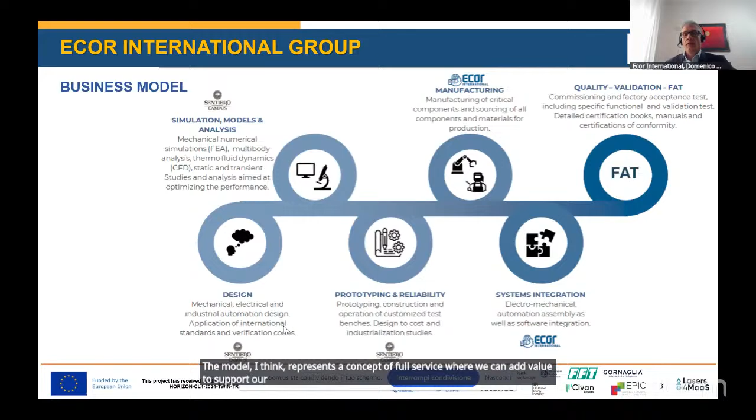Our Ecor business model offers an integration of advanced technologies for welding and manufacturing, combined with competencies in the whole product design and development up to prototyping. The model represents a concept of full service where we can add value to support our customers, not only for manufacturing but also on product design to achieve a specific function.

The business areas, as I explained before, are mainly four. Here you can see the first three that are connected with the manufacturing of components. We are a service company, so we do not have our own products, but we produce products according to the specification and requirements of our customers.

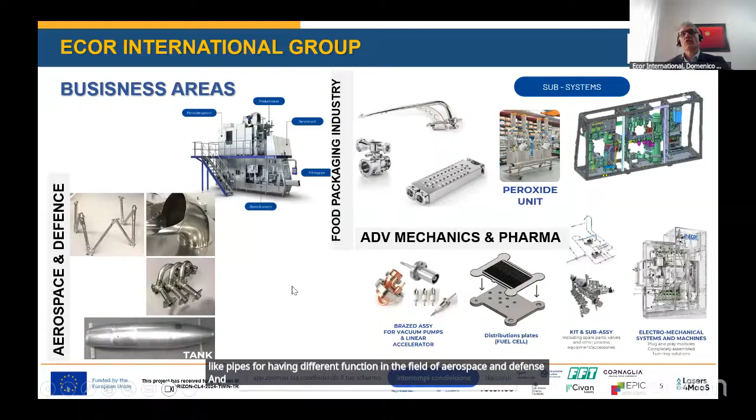Some examples to understand what we produce in different fields, and to understand how we have a really diversified market where we are able to supply different components with different qualities. We go from single components up to subsystems, for instance in food packaging industry, to structural or other types of components like pipes for different functions in the field of aerospace and defense, and really a great diversification also in advanced mechanics and pharma sector.

As I explained before, research and development for us is not only a cost, but really a business area. For this reason we have a research company dedicated only to industrial research, supporting mainly the customer and only a little bit Ecor International. The turnover is more or less 80 million euro for last year, and we have 56 persons dedicated to industrial research.

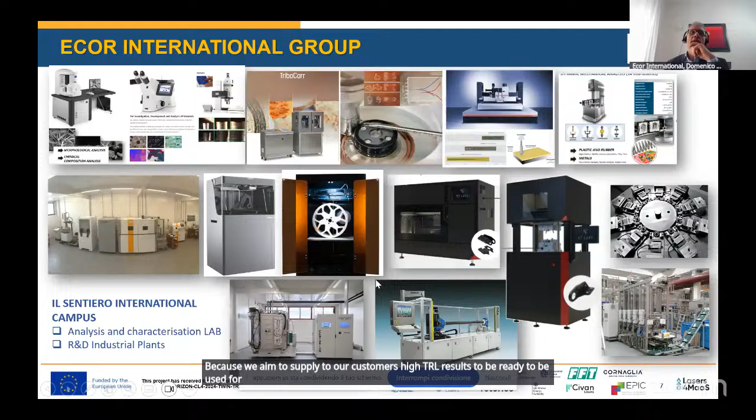Our competencies vary from 3D printing to functional design, surface engineering, metallurgy, welding, brazing technology, and so on. All the plants dedicated to industrial research are industrial plants, because we aim to supply our customers with high TRL results ready to be used for the specific aims they require.

Let's start to speak about market technology. I would like to show you how the Lasers4MaaS process project is really well integrated in the industrial area, how it aims to impact at the industrial level from the point of view of different markets, and also in the automotive or e-mobility sector.

So if we look at market penetration, this means that we leverage the company's established strengths and market knowledge in order to increase the existing markets. An example could be the improvement of product quality or features to encourage repeated purchases. From this point of view, the development or introduction of innovative and advanced technologies inside the company can be an answer to this first strategy.

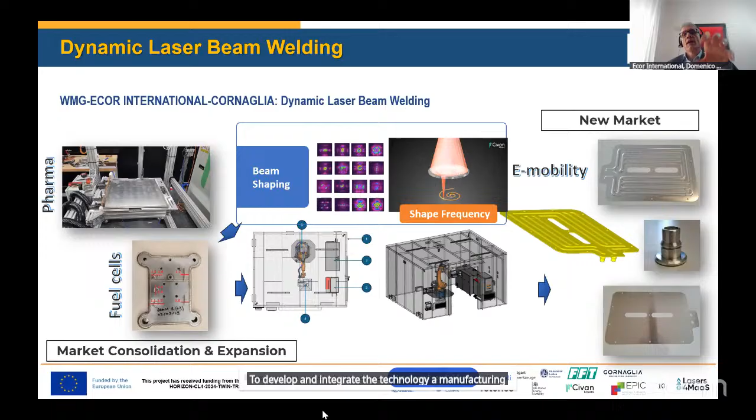To develop an integrated technology, manufacturing, and service platform able to reach this specific target.

We have seen the complexity of the parts that we produce. We have a great number of geometries, a great number of part numbers, and the thickness of the sheets we use to manufacture the different components. We have different precision constraints and so on.

Of course, all these variables impact laser requirements. So the market needs, the end user needs, and the technology needs really have different effects on what is necessary, what is required from the point of view of the end user for laser process and equipment.

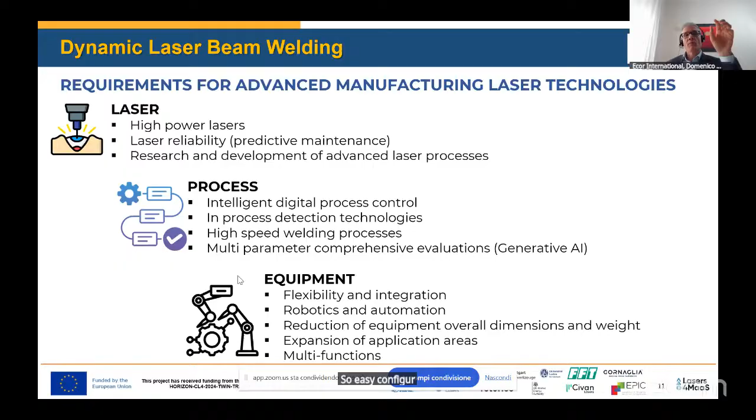I would like to stress the fact that these main characteristics cannot be considered as alternatives or standalone, because laser technology needs to be considered as a whole set of features of modern advanced technology, collected together. So easy configurability and reliable performance are mandatory for this field.

We see every day there is something that introduces a new variable in the market. By exploring new markets, developing new products and services, partnering with other businesses, investing in R&D, or embracing new technology, the business can reduce risk and increase the chance of long-term success.

So technological diversification can help organizations mitigate the risk associated with relying heavily on a single technology or market. By spreading investment across multiple advanced technologies, a company can reduce its vulnerability to disruption or shifts in customer preferences.

Then, in today's rapidly evolving business landscape, enterprises face the dual challenge of maintaining competitiveness in existing markets while exploring ways for growth and expansion. Traditional strategies for diversification often rely on geographic expansion, for instance, or product line extension, mergers, acquisitions, and so on.

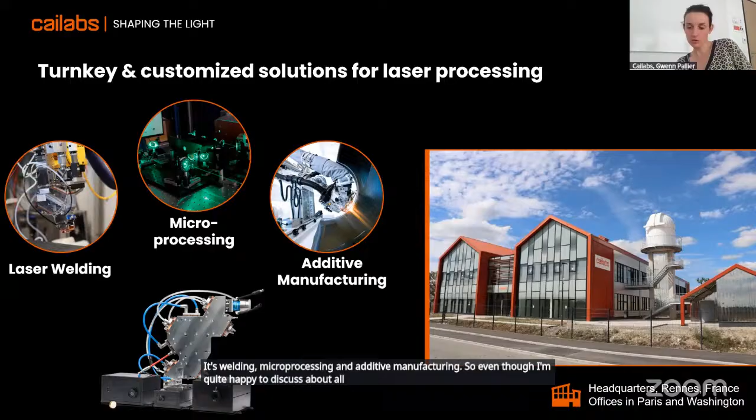So beam shaping technologies - you did say it already a few times, Antonio, even though it's only 3:37 here in France. Beam shaping is more and more discussed, and there are more and more beam shaping options. So let's try to shortly just review what beam shaping means.

First of all, why do we need beam shaping? Well, after working for a bit more than 6 years now at Cailabs, there is one thing that I'm sure of: it's nearly always possible to improve a process with beam shaping. But you have to actually go through a certain thinking process to find a good solution for your process.

The first question is, what exactly do you want to improve? I insist a lot on that, and that will be a real part of my talk today. I want to insist on problems that the industry is having and that beam shaping can actually solve.

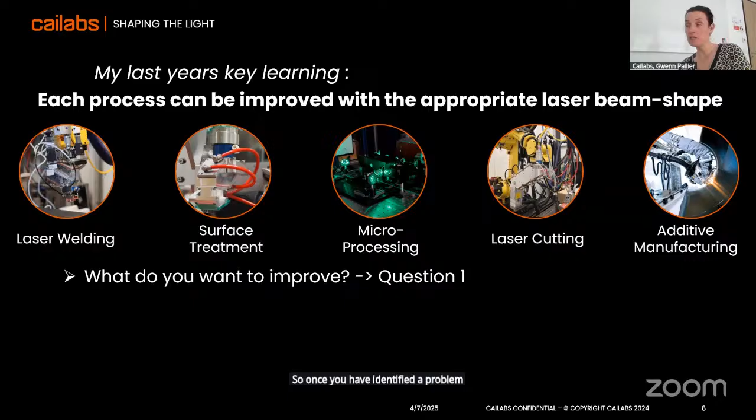So once you have identified a problem that you need to solve to improve your process, then you need to figure out what is the best shape to tackle that problem. Then when you have defined that the good shape to tackle that problem is whatever shape - let's say it's a triangular shape - what means a good triangle versus a bad triangle?

It's also very difficult, but it's quite important to identify what are the criteria which are important to improve your process. So typically, is it important that you don't have higher orders, or is it not so important? Is it important that your shape is actually really homogeneous, or is it not the main criteria? All those discussions have to be made at some point.

Once you know what is a good shape and what makes a shape a good shape, you need to think about what is the best technology to do it. There are a lot of different technologies, and because of the way the beam shaping is made, your capacity in terms of shape, but also in terms of robustness and price, are extremely different. So then only can you identify what is the best technology for your process.

And in the end, it all comes down to: will it cost you more than what you are saving in terms of money? Even though I will not address that part today, it's for sure an essential question that everyone has to address at some point. The idea is obviously to help our customers make money.

It means either improve the quality. It's quite important to know that beam shaping can help with a lot of things that maybe aren't so obvious at first, like improving mechanical properties, or processing more complex parts. All that is possible with beam shaping.

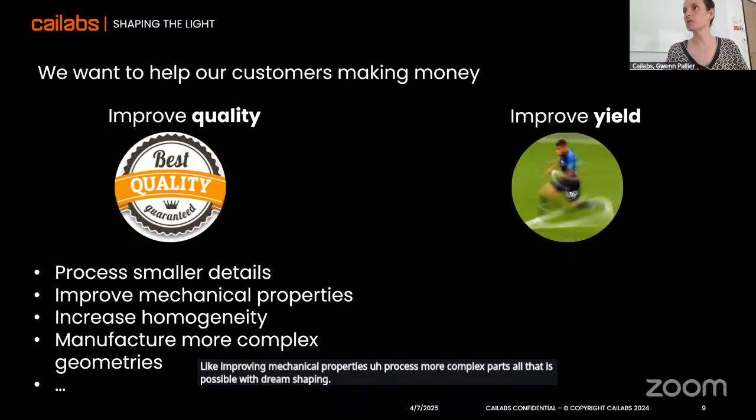But I have to admit that most of the time we try to go faster, we try to improve the yield. It can mean more speed in the process, like welding faster, but it can also mean removing steps in the whole process, like removing pre or post-processing, which has a huge impact in the end on the whole time of the manufacturing process.

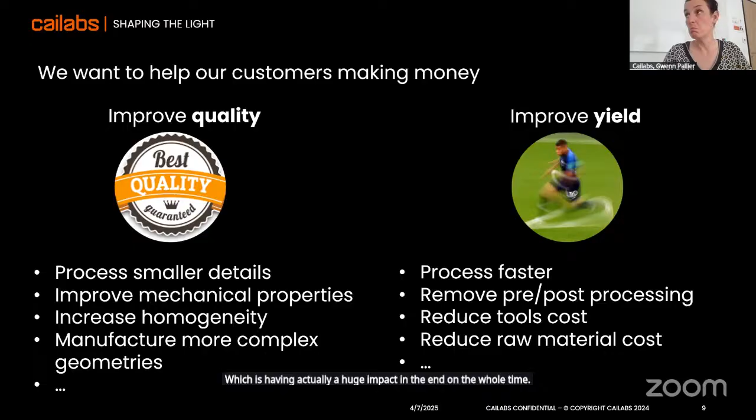You have multiple fibers, which are not all made the same way, but in the end, basically you can make a ring and a dot. Then you have coherent beam combining, which is in the end dynamic beam shaping, so it's a beam moving very fast.

And then you have a lot of ways to do beam shaping which are not inside the laser. So in that case, you are more or less free to use whatever laser you are having, and you are implementing the beam shaping after the laser, inside a module or inside a laser head. And all those technologies use different ways to design the system, but also different ways to manufacture it. And in the end, it gives different performances. I don't have time to discuss all technologies today, unfortunately, but I'm quite happy to discuss it if you wish to reach me by email.

And I will focus on explaining what we at Cailabs are doing. That's what we were doing 10 years ago: multiplane light conversion. The idea is to do freeform beam shaping, any kind of shape, but we also manage to tune the phase profile. So it means that you have a shape which has a planar phase in the process plane, which is extremely important if you want an extended depth of field. And we do that based on mode propagation, which is a system that is fully reflective. And what you see on the right is how it looks when we develop products for laser processing.

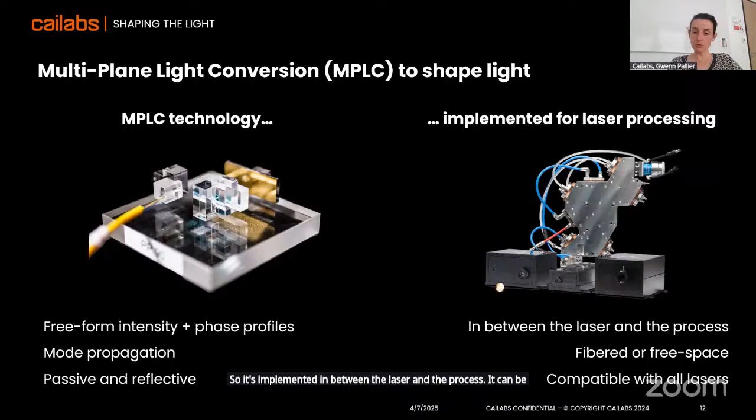I generally like to say now, there are so many technologies, just like there are so many ways to make a laser - fiber laser, diode laser, disc laser. And after some years, it's been identified that some welding is best done with some type of laser. I expect that one day the same will happen with beam shaping, and we will have a clear map of what beam shaping technology is best for what process. But this map doesn't exist yet. Just to say it, what Cailabs proposes is compatible with all types of lasers, monomode to diode lasers, CW to ultra short, and all wavelengths.

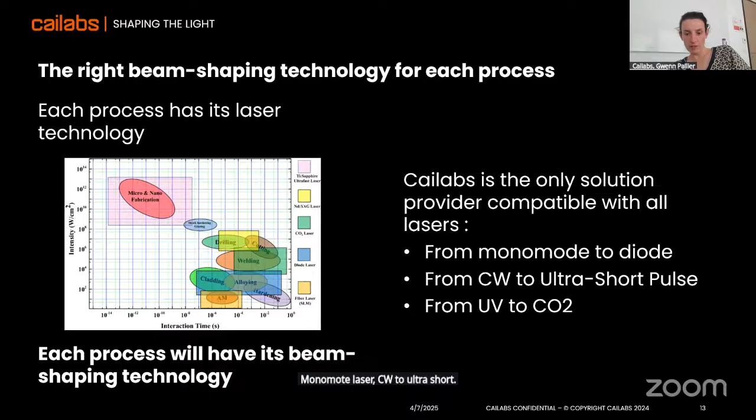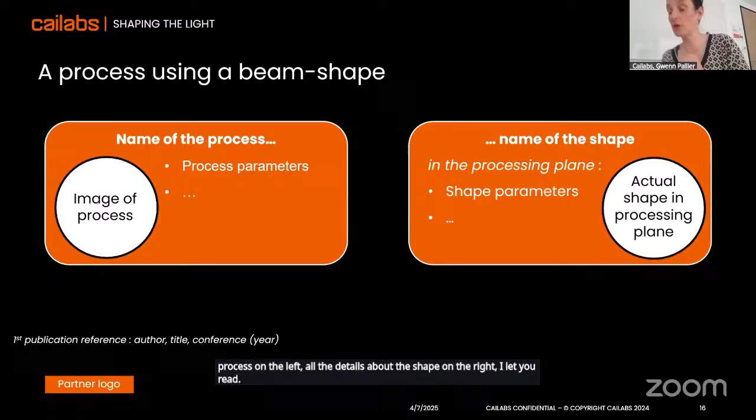So there are a lot of ways to do beam shaping. We have our own way at Cailabs. But why is beam shaping actually a game changer if you want to be a world leader in e-mobility? Some process results - I will go through a lot of different applications, and I don't want it to be too technical a presentation, so I will not be detailing all the process parameters, dimensions, setup and all that. All my slides will be organized the same way: an image of the process on the left, an image of the shape on the right, all the details about the process on the left, all the details about the shape on the right. I'll let you read - even though I speak very fast, you are all reading faster than me. And I will then explain why that shape can improve the process and why it's actually useful for the industry.

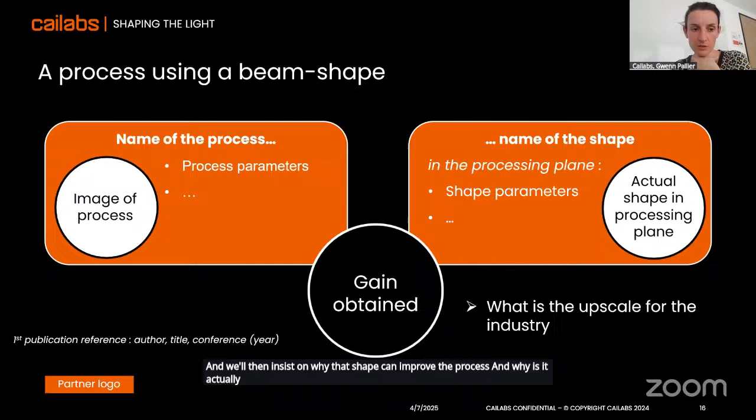We started with hairpins, which is a quite classical application, made of copper. In that case, we wanted to focus on the spatters. Spatters are really critical when you do hairpin welding, because you don't want to have spatters going to another hairpin further, and in the end having

shortcuts in your electrical circuits that can make the car burn, or whatever terrible thing could happen in that case. So we managed to demonstrate, by just changing the beam shape from a standard shape to a ring and dot, that we divided the spatters by a factor of 2. This is actually super important if you want to reduce the scrap rate, to increase the

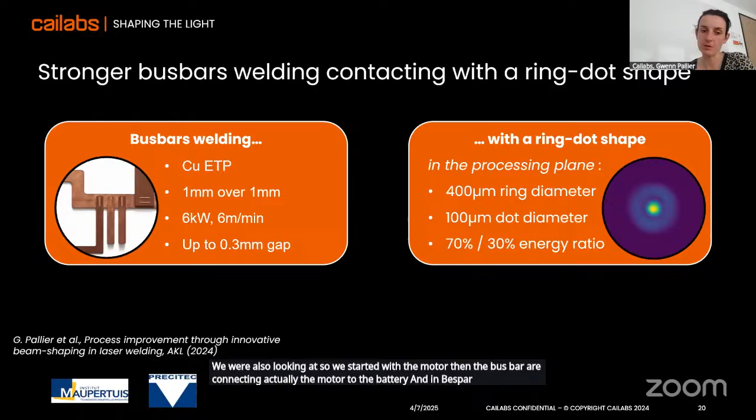yield of your manufacturing. We were also looking at bus bars. So we started with the motor, then the bus bar connects the motor to the battery. In bus bar welding, it's also essential to apply beam shaping if you want to manage a higher gap. It's quite known in e-mobility that you need zero gap welding. Well, it's not that true. It's possible to manage some gap, and beam shaping is really helping a lot when you want to do that.

If you apply the proper shape, you manage to actually increase the gap that can be accepted, and that gives compliant results by a factor of 1.5 compared to no beam shaping. This is extremely important if you want to simplify the fixtures. Fixtures are complex and expensive and long to manufacture, so that's an excellent way to make your production more flexible and simpler.

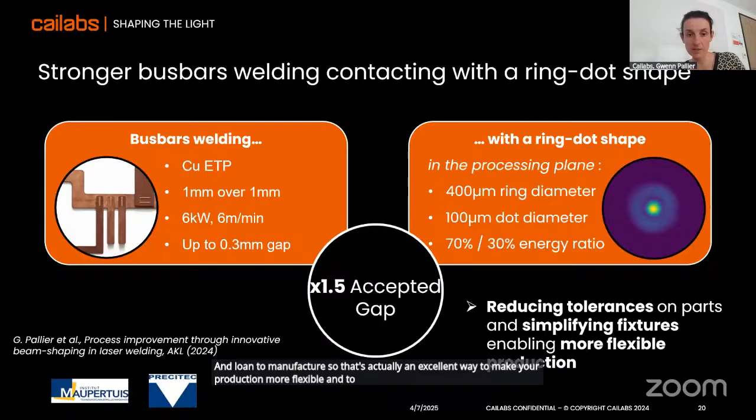The motor, then the connection to the motor, then we go to the battery itself, so cell contacting. In that case, we were working with the only battery module which we could communicate about, because most of the time it's super confidential. So that module is developed by Fraunhofer ILT. As you all know, you have seen probably electric cars in the streets.

So it's been existing for a long time, and there are ways to do this cell contacting, but the most common way to do it is to use what is called wobbling. Wobbling is doing a lot of little circles during the process. And I was quite strict with our partners, and I said, don't do wobbling. Whatever you do, don't do wobbling. We want to replace wobbling with beam shaping, and it works.

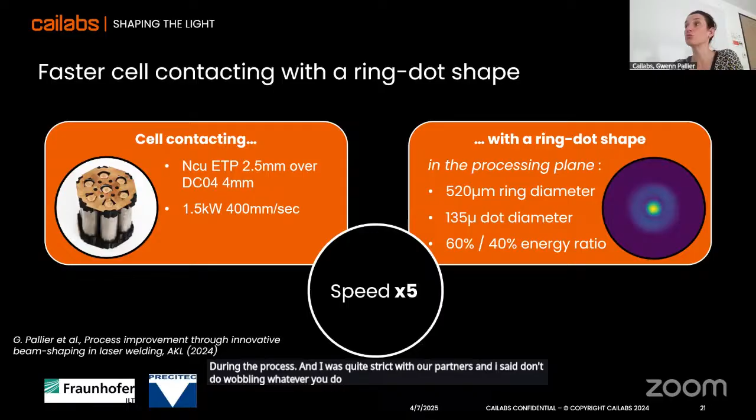If you don't do this wobbling when you are doing the cell contacting, you can actually increase the speed by a factor of 5. That's, of course, excellent to increase your manufacturing yield.

And again, regarding the bus bar, there was one last point that I wanted to stress: you can also weld deeper. If you have an extremely stable melt pool at a fixed power—and I insist, at a fixed power, because if you have more power, of course, it's easier—but you can slow down the process, which is super difficult, keep a stable keyhole, and manage to weld deeper. In that case, we were managing to weld 3 mm over 3 mm at 8 kilowatts.

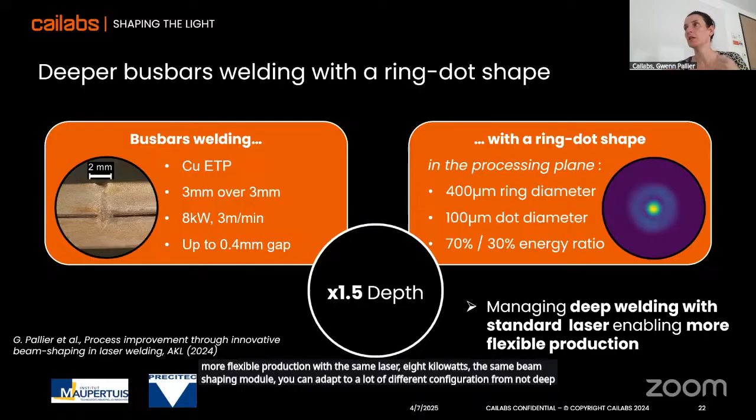Why is it so useful if you want to be a world leader? Well, it enables a more flexible production. With the same laser, 8 kilowatts, the same beam shaping module, you can adapt to a lot of different configurations, from not deep weld to deep weld of copper. It's working in any case, and it's extremely nice to have a flexible production.

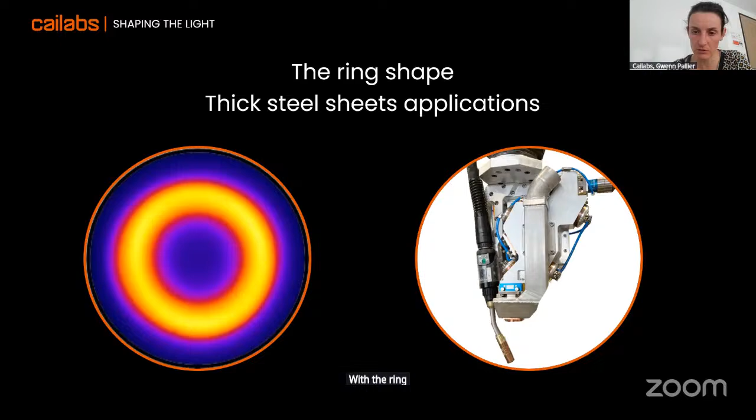I will shortly mention some other applications, because I think it's good to talk a little bit about copper, since it's a classical topic of e-mobility, but we have actually worked on other parts of the vehicle as well. In that case, we have developed a solution which is a hybrid laser arc welding with a ring shape and with an arc which is added to the laser head. This is the laser head with the connector, collimation, shaping mirrors, and focusing optics.

For now, we have been working on steel, but we will extend to other materials in future. The idea is, again, to manage higher gap. So it's definitely possible with a ring shape to increase the gap which is accepted when you are doing thick welding. In that case, we were actually welding steel plates of 28 millimeter thickness, which is excellent to compete with arc welding.

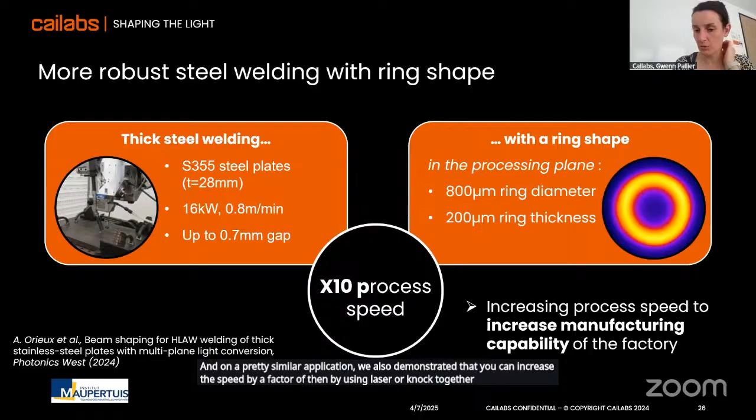So it's very difficult to switch from arc to laser because the process can be a little more challenging, but it can also be more reliable and more efficient. You need to have something very robust, and beam shaping enables that. On a similar application, we also demonstrated that you can increase the speed by a factor of 10 by using laser and arc together, which is obviously very good for manufacturing capability.

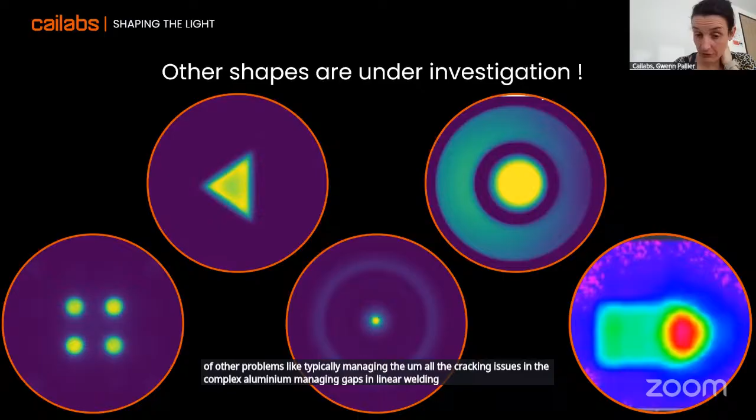There are a lot of other shapes that can solve other problems, like managing cracking issues in complex aluminum, managing gaps in linear welding, and a lot of different problems. There will be many more results in the future, so follow us and look at what we are developing. We are really trying to address a lot of different issues with our beam shaping solution. This is just the beginning.

We are working on having systems compatible with more power. We want combined functions, we want dynamic systems — it's already under development, we did it at R&D stage, and we have to make a product out of that. We also work on new wavelengths, complex shapes that are not possible with other beam shaping technologies, and new applications.

So my conclusion now — I think I did show it today. It's really possible to upscale laser welding with beam shaping. We are really providing solutions for a lot of issues in the industry. And I always insist people think out of the box. There are a lot of possible shapes in the world, and it's not clear yet what shape is best for what process. So keep bringing us problems, and we will try to keep bringing you solutions. This is it for my presentation.

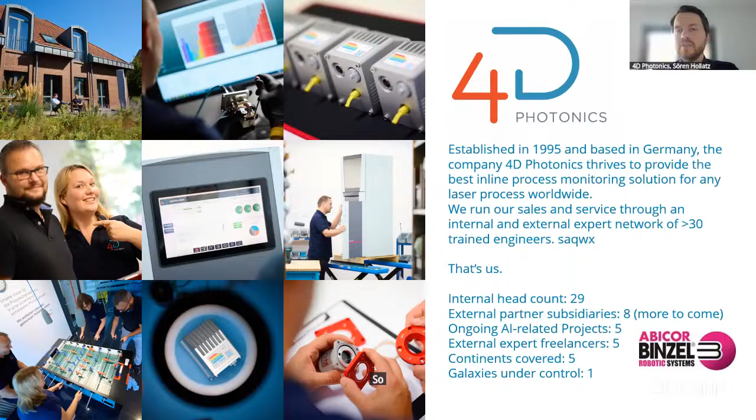For laser processes and process monitoring, we have two main goals that we are dealing with in our products. First of all, we'd like to increase the process monitoring accuracy, because having pseudo faults or missed faults is very, very painful, and at the end very expensive in production.

The second goal is that we also like to classify the faults. So having a bad part is one thing, but having a bad part where you know the reason why it is bad, that helps you to adjust your production, to maintain your clamping devices or your safety window, let's say optics or whatever might cause this fault. These are always the goals that we are offering the customer.

Therefore, we have introduced a new product, the 4D sensor system, and this whole system is called 4D Watcher. It is based on photodiodes, so we can coaxially integrate it into a laser head.

So we can coaxially integrate it into the laser head and acquire the data that is coming from the process. All kinds of light emissions exposed by the process are going into our sensor system, and there we have a couple of different photodiodes catching the laser radiation, the visible range, and also the near-infrared range.

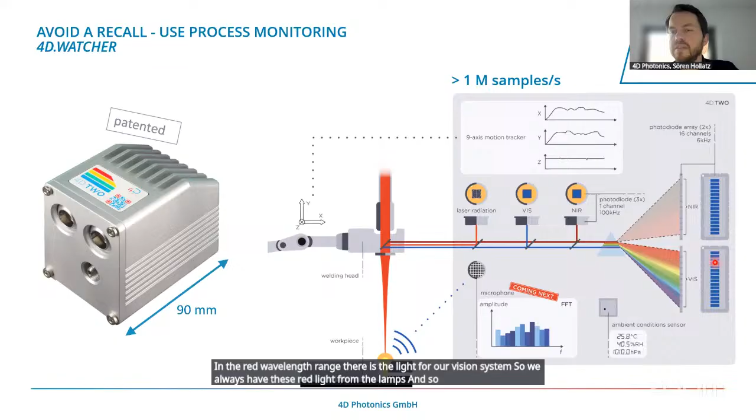We usually do not need any kind of hardware filtering. We can just say, in this range, like in the red wavelength range, there is the light for our vision system, so we always have this red light from the lamps. We just leave these channels out of our monitoring without having any filter necessary there.

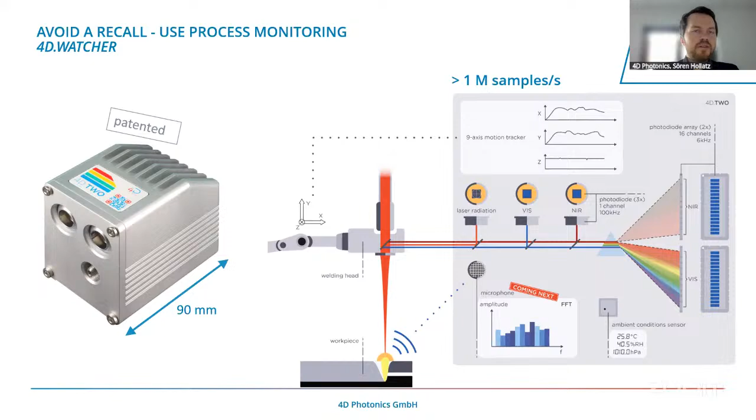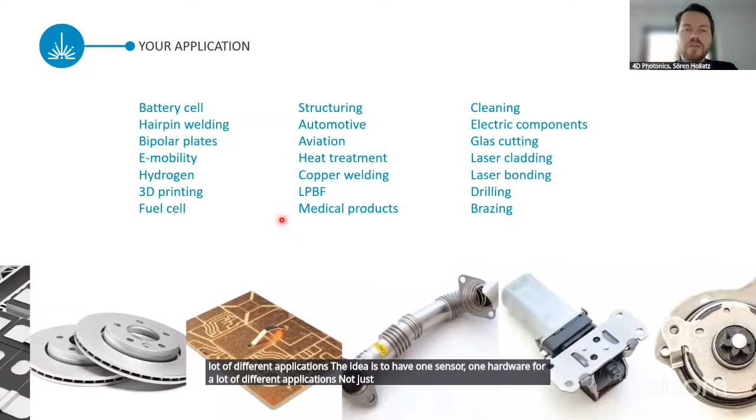With this sensor, we're trying to reach a lot of different markets, a lot of different applications. The idea is to have one sensor, one hardware for a lot of different applications, not just laser welding, also laser powder bed fusion, laser cladding. There might be also a picture of a brake disc here on the left, and also ultra short pulse processes and whatever you might think of.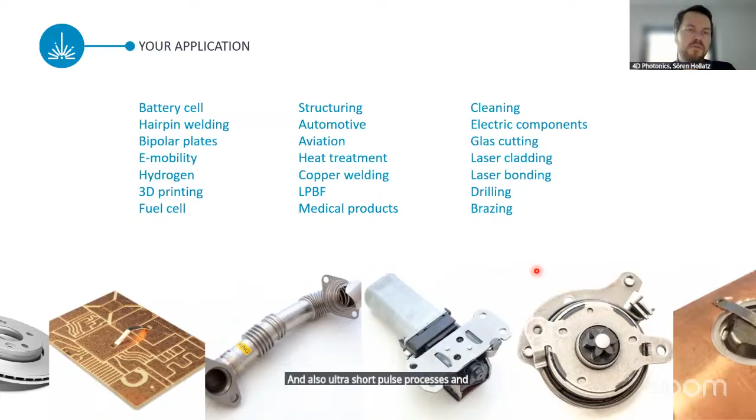So for today, due to the limited time slot, I've brought two examples of what we are right now doing, and there I focused on faults which are very difficult to identify with other sensor systems or in visual inspection in this case.

The first one is gap detection. Gwen also introduced that it's no issue with their laser to weld with a gap, but still it's an issue that happens there and which we like to avoid, or at least to detect, so we can decide if we can tolerate it or not. And this is a fault you usually can't see, especially when we're talking about battery welding with a couple of hundred battery cells in a module. You can't see if there is a gap under your bus bars.

And there we did a lot of experiments with a couple of research institutes first, and then with a couple of companies. This one is exemplary data from an aluminum to aluminum overlap weld, like for prismatic battery cells. Here in the bottom, we can see the result of one of the welds that has a gap inside. So in green, this is our reference band. All of our reference welds' signals are included in this green area. This is more or less the area which is fine for us, which we are tolerating right now.

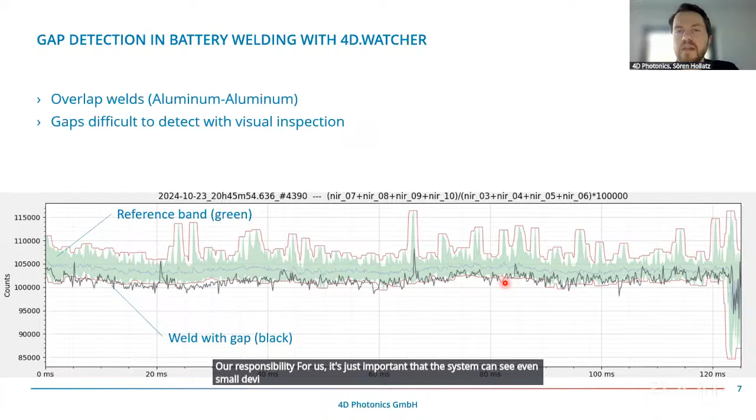Another short example, Gwen has also introduced you to the hairpin welding, welding of two copper pins. Here's one main issue that this process can lead to pores inside your hairpins. And this is also a fault type which is very difficult to see with different visual inspection methods or whatever else you can think of. And as long as you're not going to do a very expensive CT analysis, we might help you with our sensor system.

So to make clear, we are not able to directly measure the gap or acquire the gap or measure kind of pore volumes. We can just give you a probability based on the process. The process is changing in some way, and we have to match it to the fault which is occurring in the end.

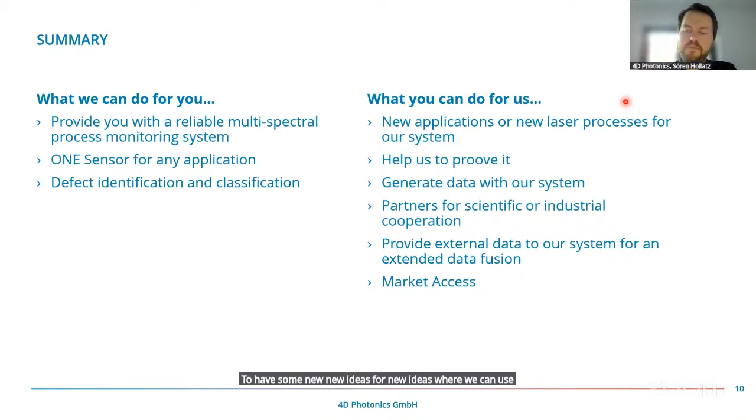So that was a short overview from my side. If there are any questions, I have a lot more slides, but we are limited in time, so I'll keep it with this one.

Hi, thank you for the talk. I have a question regarding welding—the wobble technology is quite used, and I would like to know, is there kind of an interplay of this XY wobble technology to your sensor? I mean, does the signal change, and do you need to make new reference measurements in case one uses the wobble technology?

Yes, the signal definitely changes because when you're wobbling, if you have a circular wobble for example, you're always hitting cold material in the front and warmer material in the back. So this is definitely affecting the signal. But usually it's not an issue that it won't work at all. You just have some kind of a sinus wave on your signal, and you're doing the reference process again for your wobbling process, and that's not an issue.

Also, we're actually dealing right now with the idea to combine our sensor signals with the scanner data, so the scanner position data. And in our lab it actually works pretty good. So at the end we can have like a two-dimensional spatial path of your laser, and we can match our sensor signals to this one. So you can also see if you have some irregularities due to this wobbling.

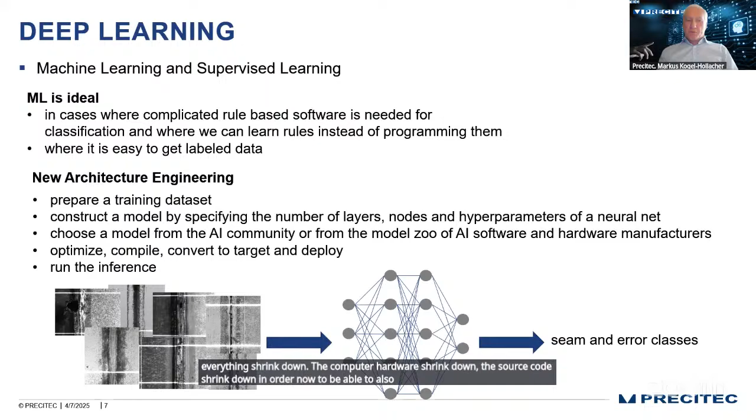So it's really fascinating how everything shrinks down - the computer hardware shrinks down, the source code shrinks down - in order now to be able to also process, meaning in real time, get the error classes out of that. And doing that, for example in tailor welded blanks, we have a very high classification accuracy now. So when we go with pre-weights, we are already at 99%.

So this is really, really fascinating how much we now can support customers' applications with very accurate monitoring. But for sure, monitoring is not only camera-based. Typically, the applications are much faster, and really extremely fast camera technology is also extremely expensive. That's why we are still working also with photodiodes.

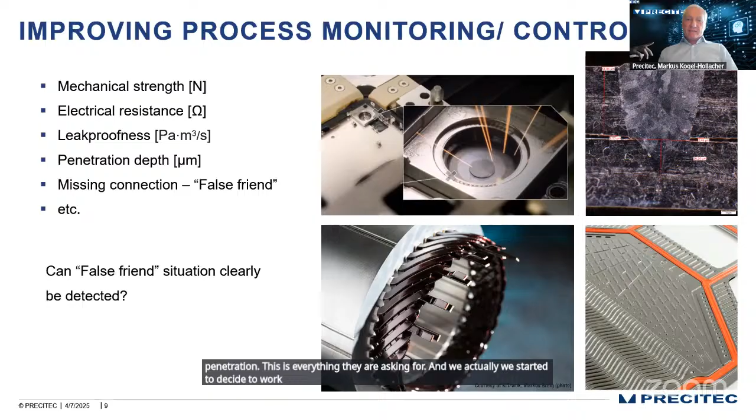This is the so-called laser welding monitor, which is Precitec's invention since some years. And as I said, customers want real information coming out of that application: mechanical strength, electrical resistance, leak-proofness, penetration depth. This is everything they are asking for. And we started to decide to work on that data, and we decided to go with AI.

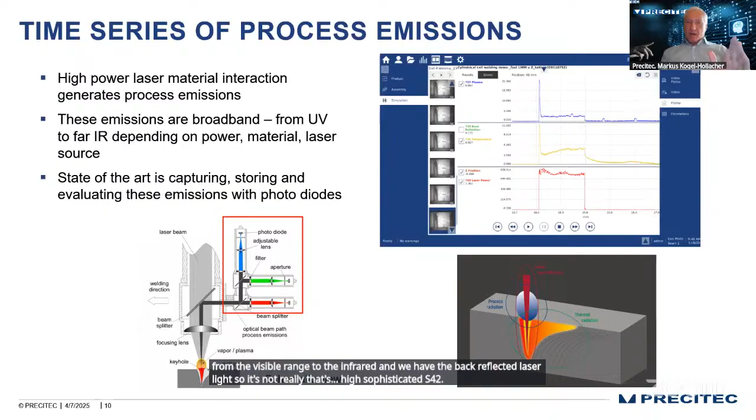This is more or less, let's say, a little bit the little sister of the 4D.TWO, because we are just working with three photodiodes and three wavelength areas from the visible range to the infrared, and we have the back reflected laser light. So it's not really that sophisticated as the 4D.TWO, but this is our tool which we use to derive the AI. And as I said before, it's much more easy.

It's much more easy to do that when the process is running smoothly, when you can overcome problems easily. And this is possible by the application of shaped beams. This slide here I did present first time some years ago at a presentation at the AKL in Aachen.

We are now at a point, and Gwen did elaborate on that quite nicely, where we start to really know which beam shape is affecting processes in which positive way. So we now have the possibility to have application-specific shapes at the workpiece surface to make processes much more forgiving. This you have seen before, Gwen has shown that. So it's what we as Precitec are happy to sell these days.

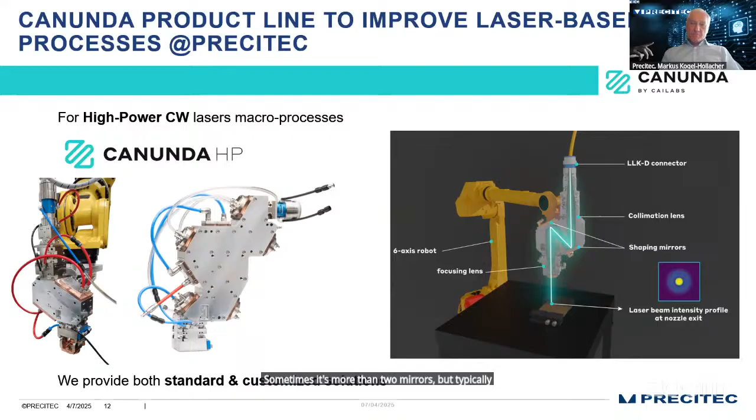So we have a contract with Cailabs where we can bring those fascinating MPLC modules into welding applications. Sometimes it's more than 2 mirrors, but typically we go with a 2-mirror one, which is shown on the left. And also one application from my side, which actually shows that shaping technology is compatible to the photodiode sensor technology. So this is what we did, what the colleagues at Institut Maupertuis did together with a colleague of mine and together with Cailabs on an application which is somehow related to e-mobility, related to automotive these days.

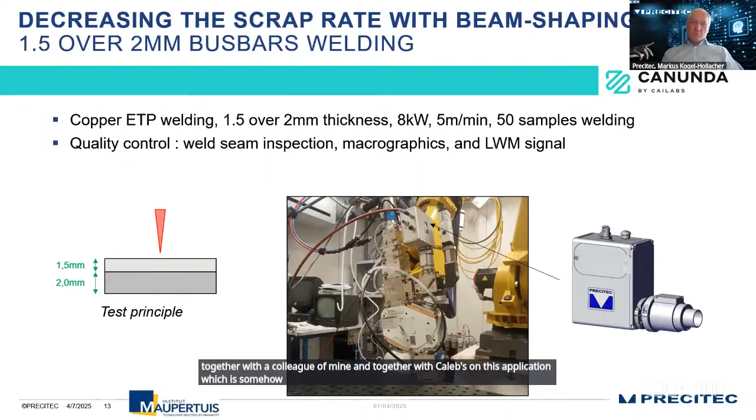You see it's copper welding. And for those who have at least a little bit of experience on single traces on those welds, might actually see that the lower and upper limits of these welds are so tight to the resulting emissions. This is quite fascinating. And you see here some applications - we did run 50 welds. Everything is really, really smooth. You see it also on the cross sections.

Sometimes you see a red light, which is indicating an error. So we cannot get rid of the errors - this is not meant because there are still influencing factors which we don't have in our hands: contamination on the workpiece, let's say some irregularities in the materials, so you cannot have everything in your hand. Nevertheless, you see there are some pores actually which then also nicely be detected because the process is so smooth and it's so forgiving.

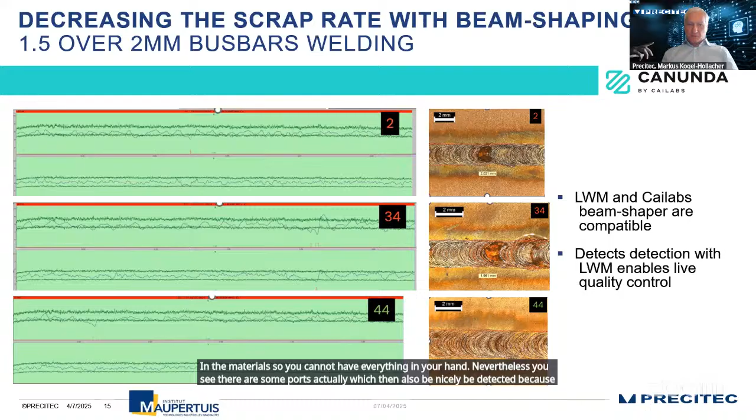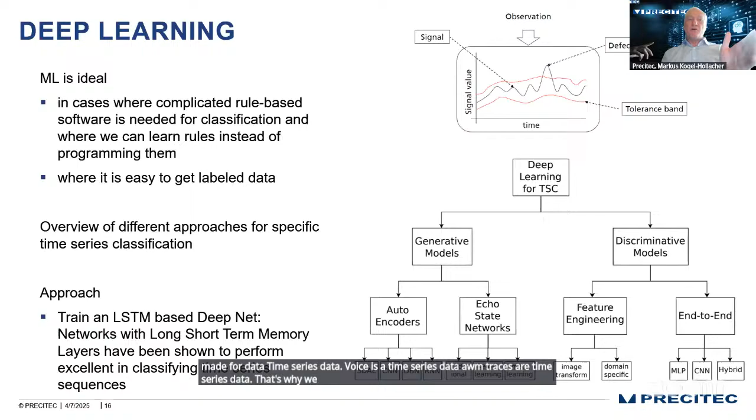And when we apply deep learning on those photodiodes, we go for a very, let's say, more old-fashioned deep net, which is called LSTM. A long short-term memory is also used by Siri and by Alexa. So it's especially made for data, time series data. Voice is a time series data. LWM traces are time series data. That's why we can easily apply that machine learning tool out of those many machine learning neural networks which are on the market.

You see, this is just an overview of what possibilities you have to work on data. So we just picked out that one. You for sure have that presentation here afterwards available, so I will not read everything what is on the slides, but this is that machine learning tool, that neural network we apply mostly on our time series data.

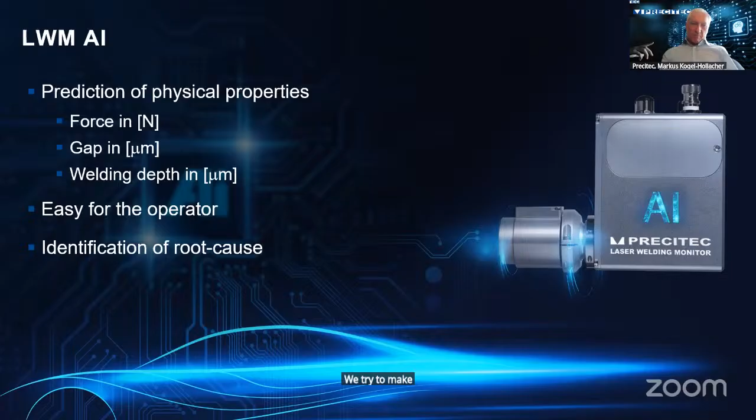We try to make it easy for the operator, and it really helps to identify the root cause. If you compare classical LWM to LWM AI, you see there are a lot of advantages to go for AI, and a lot of advantages to go for AI in combination with beam shaping. The more robust the process is, the easier the process monitoring is, the faster the AI is taught onto a specific process.

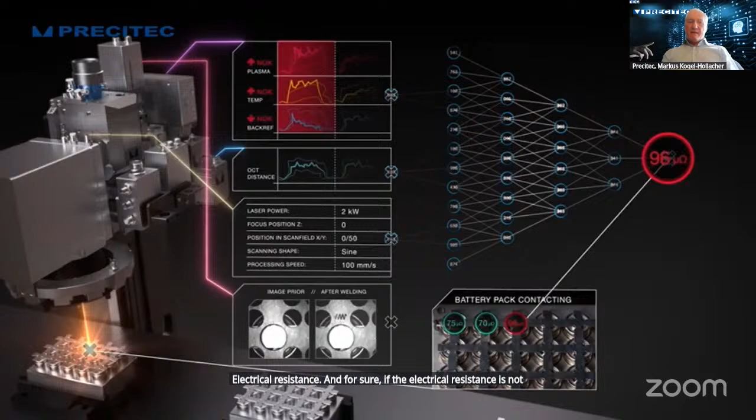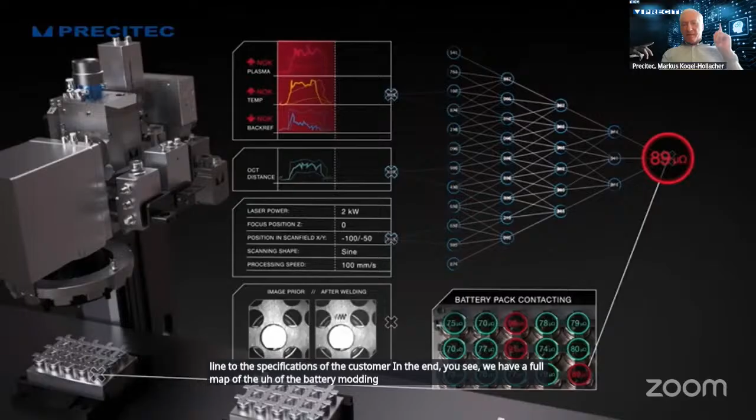This here is out of a video, I think you can also find on YouTube. This is one of the applications we've done together with Audi, now on battery contacting, and you see we derive the electrical resistance. If the electrical resistance is not in line with the customer's specifications, in the end you see we have a full map of the battery module, and this is quite nice because we are not using the full interface between the battery and the connector.

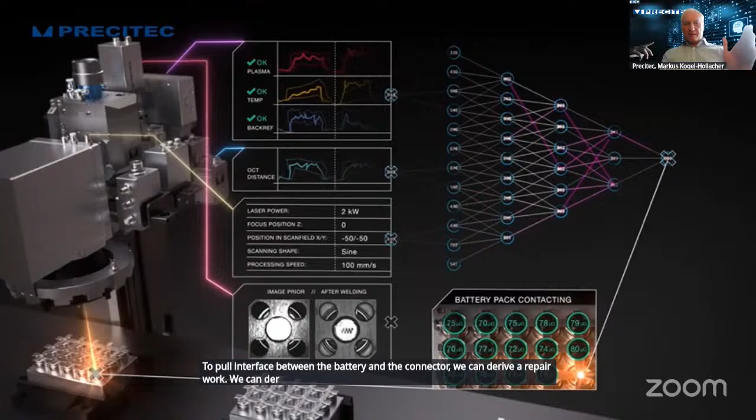We can derive a repair weld at the points where the electrical resistance was not in line with the specifications, and then, at least with a high probability, bring out a full working battery pack for the customer.

And yes, there's something we may go for - if the world starts to communicate again and isn't fighting against each other, then we maybe have the chance to work on an AI cloud, not just Precitec. Working together is important. We see that now in combination with K-Labs, and we see that in other cases. Partnership is really important.

And I can say, combining AI and beam shaping, this is a clear yes to the question: is that a disruption for the laser industry? It's a clear yes. And we don't want to see those processes anymore - you see it's spattering, a lot of things happening. In the future, this is a spatter-free process because we apply beam shaping.

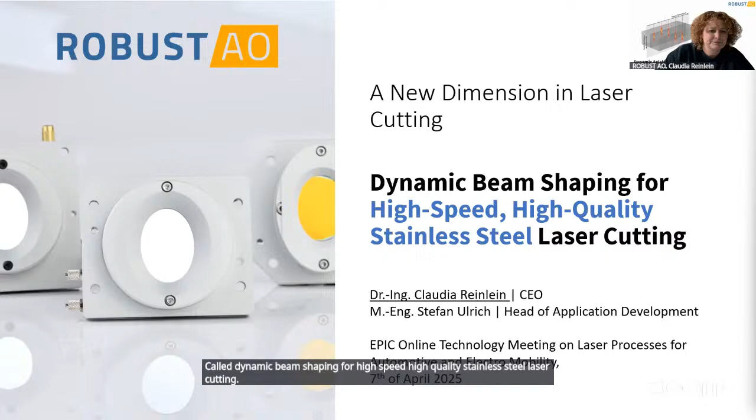I would like to start with a few words about the company. The name of the company is Robust AO, and it means we do robust adaptive optics. We are really a pioneer in the industrialization of high power adaptive optics. To narrow it down, we do deformable mirrors for high power applications. We have a small team now, 8 people, but we are very experienced in designing deformable mirrors and controlling them very fast, and also in application development. Last but not least, the company Robust AO is a spin-off of Fraunhofer here in Jena.

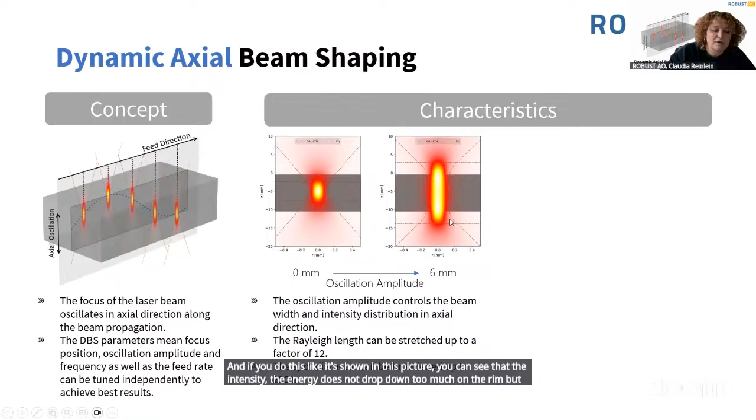If you compare what is feasible with a static beam versus a dynamic axial beam shaping beam, you can broaden the spot diameter up to 250%, and you can increase or stretch the Rayleigh length by a factor of 12. If you do this, you can see that the intensity, the energy, does not drop down too much on the rim, but is very constant along the very long shape. This is really the trick of dynamic axial beam shaping.

The other degree of freedom is the overlap. I'll show you two possibilities. The overlap is tailored by the feed rate and by the oscillation frequency. If you have a very low overlap, like minus 250%, then you can see that the beam is traveling in a zigzag way. And if you have an overlap of 50% and above, then you have a constant energy distribution along the feed direction.

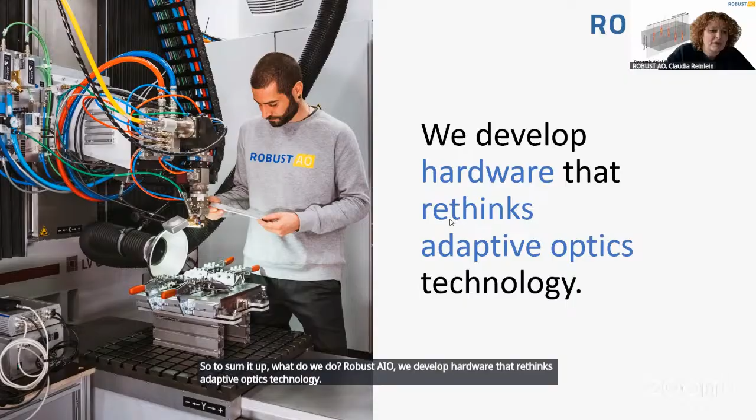So to sum it up, what do we do? At Robust AO, we develop hardware that rethinks adaptive optics technology. The product that we're doing is the Zwobbel technology—Zwobbel because we wobble in the Z direction—and it's a deformable mirror.

It has a very thin mirror membrane here in yellow, and we have a piezoelectric actuator that acts on that membrane. And we have a sensor, because if you use piezoelectrics, it's quite fast, but you also have hysteresis and nonlinearities, and we want to have an absolute position feedback. That's why we're using the sensor.

It is implemented in a standard cutting head as a 90-degree deflection, and it produces almost ideal biconic mirror deformation at the highest speed. To give you some numbers, the maximum oscillation frequency that we have now is 3,500 Hertz, and the minimal step response between minima and maxima deflection is below 2 milliseconds. So we are quite fast.

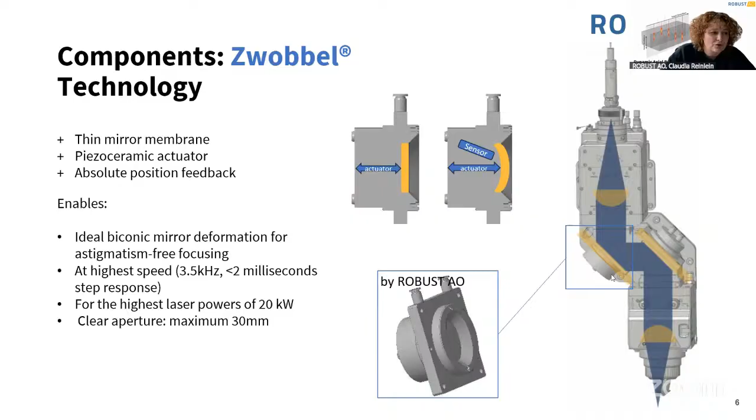This is our first USP. The second one is that we like to work with high power lasers, so our actual limit is 20 kilowatt—that's because we were not able to test it with higher laser loads. And what we already showed up to now is that we have loads of quality improvements regarding edge roughness and dross. We have larger process windows, like higher nozzle distances, and of course we have higher cutting speeds.

But now I'll go a little bit more into detail, and I would like to start with one of our latest results in terms of fusion cutting of stainless steel. Here we have the results of the cutting speed over the laser power, and we compare our technique with the static focus that you probably all know. You can see that the actual DBS is, at all power levels, faster than the quality cut of static focus.

In the low power of 8 kilowatt, we are more than 80% faster. And in the high power of 20 kilowatt, we are 37% faster, which is equivalent to 5 kilowatt laser power. On the right-hand side, you see some details on the quality. With the static focus, the quality remains more or less constant with an average burr of like 200 micrometer. With our technology, we can improve the burr by at least a factor of 2.

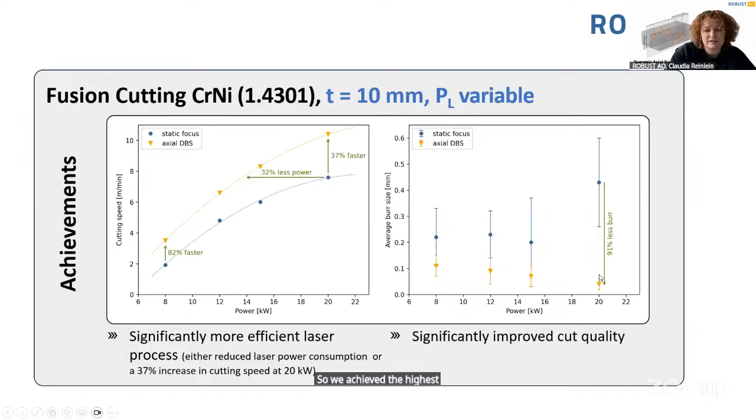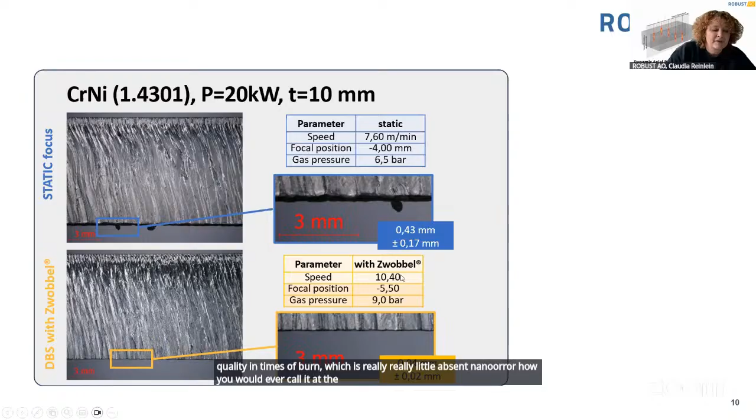And if you go a little bit more into detail, beside the dross reduction and the faster cutting, we also have a significant reduction of the roughness by, let's say, a factor of 2. These results were all in the same sweet spot, so we don't have a difference between separation and quality cut. It's all the same in our case.

This is another example in stainless steel, also a thickness of 10 millimeter, but with lower power. And this was a bevel cut. You see also that we could reduce the burr to very, very little values, and we could also reduce the roughness of the cut.

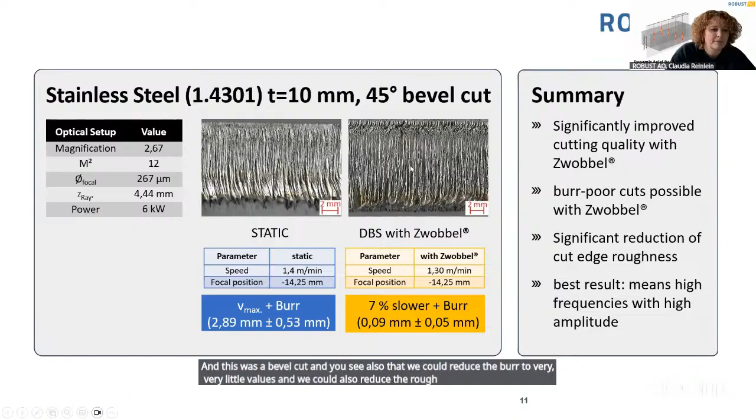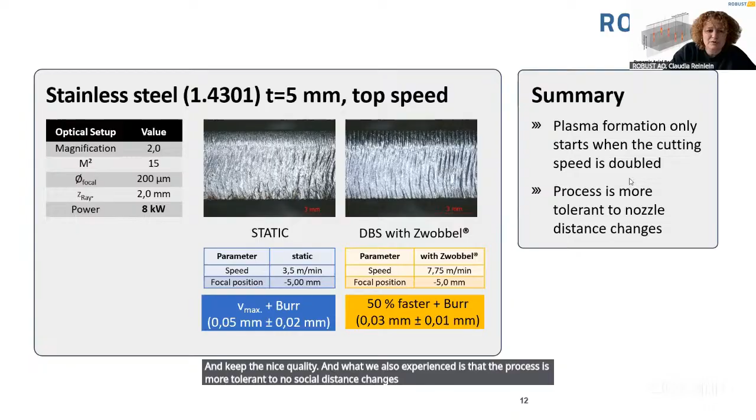And what we also experienced is that the process is more tolerant to nozzle distance changes. So it's a more robust process if you compare it to a static spot.

And finally, I would like to show you some results for the systems integration. So we made the integration into robot arms. If you have just low power, which is accessible by robot arms, if you have the beam inside the robot, it's available in a LASERVORM machine for fine cutting. And it has also been tested in a Nukon machine for thick sheet cutting up to 20 kilowatt.

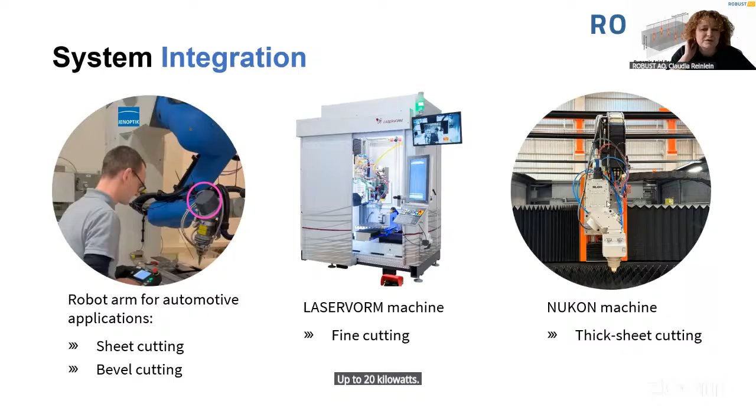So to sum it up, we focus on quality improvements without losing speed. So we provide quality cuts at separation cut speed. We show that we can really reduce nano burr in stainless steel. Our goal is always to remove any post-processing, so that you can take the part out of the machine and use it. Our current upper limit in laser power is 20 kilowatt, so if you have any 30 kilowatt laser and above, we would be happy to test it.

And what can we do for you? If you have any issues in cut quality in metal or also glass, independent of the wavelength of your machining laser, please let us know. Any need in super fast light focusing, and we would also be interested to spread our experiments a little bit more into welding applications. So what you can do for us is if you have any issues in quality or would like to test the technology, then please let us know and we would be happy to help you.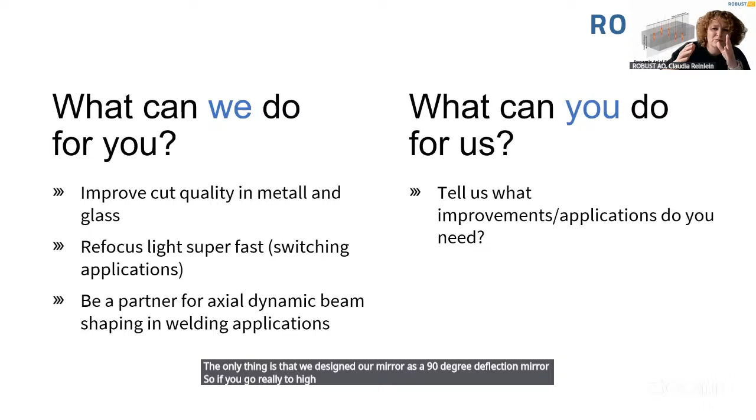Okay, so in general we can use standard laser heads. We have been working with almost single mode lasers and multi-mode lasers. The only thing is that we designed our mirror as a 90-degree deflection mirror. So if you go really to high power applications, we would need 2 mirrors in order to make sure that the laser still comes from the top, what is normally the intention. But beside that, we don't need any particular plates or whatever. The system is quite non-sensitive to changes in the diameter. We can work with 10 millimeter, 15 or 20 — it's always the same mirror. So we don't have hard restrictions here.

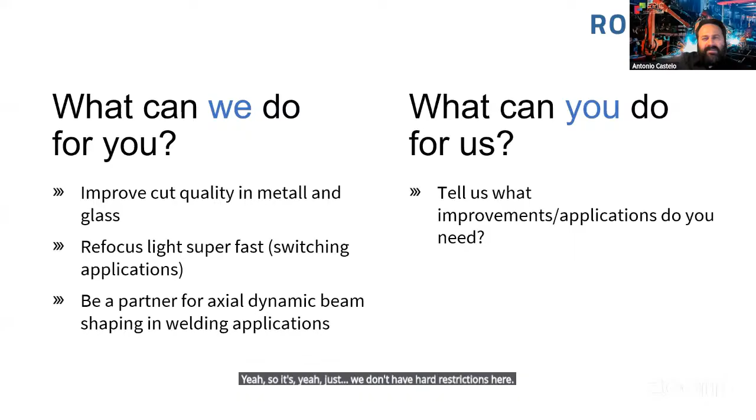Well, what about wavelengths? Do you have different solutions depending on whether it's infrared or visible laser?

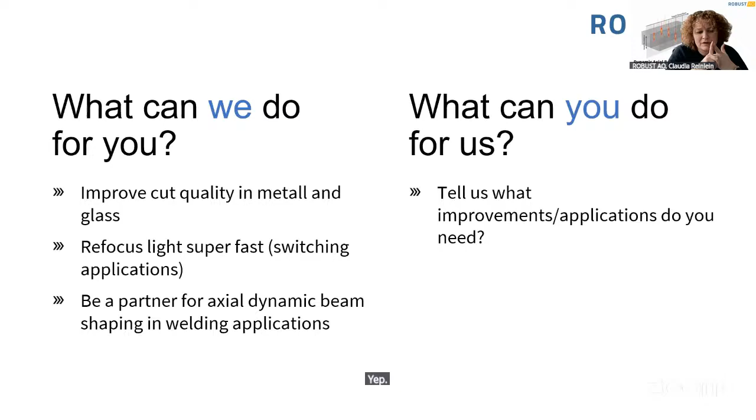Yeah, our standard working horse is between 1020 and 1080 nanometer, but it works also for 980. We also have mirrors for UV, like for the electronics industry. We have a mirror now that has been set up for 2 micrometer — this is also a new wavelength in cutting, welding, and so on, so we can also go in this direction. And we have one for 10 microns, but to be honest, there are not many people that still would like to be innovative with 10 micrometer. But we have just a glass mirror, so if you have any wavelength I did not mention, you can be sure that we can work with this.

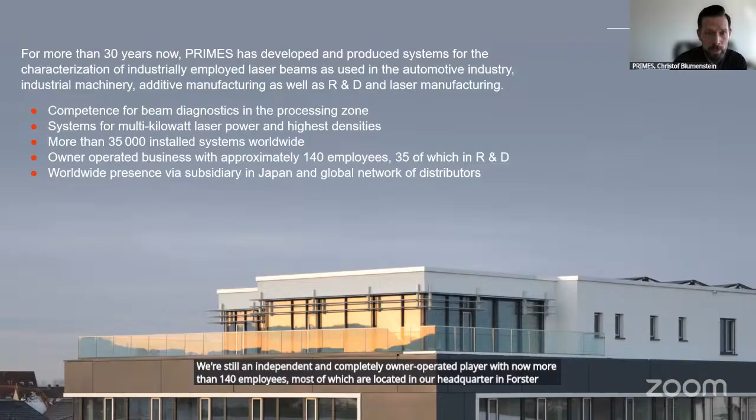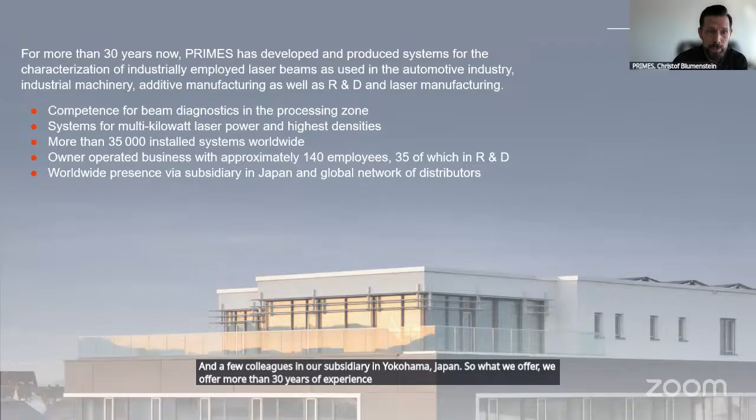First of all, what we at Primes do: we develop and produce systems for the characterization of industrially employed laser beams, as used for example in the automotive industry. We're still an independent, owner-operated player with more than 140 employees, most located at our headquarters in Pfungstadt in the Rhine-Main region, with a few colleagues in our subsidiary in Yokohama, Japan. We offer more than 30 years of experience improving laser-based processes. Our portfolio ranges from laser power measurement devices and devices for characterizing the propagation of laser beams to integrated all-in-one solutions, for laser manufacturers through to end users.

What we look for are challenges, such as programming suitable software to answer all imaginable questions related to the performance of lasers - our laser diagnostic software.

So why use lasers in welding? Other presentations might have answered this fundamental question already, but we often have a slightly different view of this process. For example, precision: laser welding is the method of choice for applications requiring a high degree of precision. Because of the low heat input, laser technology is the best method to weld highly sensitive components. And last but not least, efficiency: the production of lithium-ion batteries is a very complex and sensitive process involving very high material and energy costs. For this reason, the manufacturing process must be very efficient, with high batch numbers at low cost. To take advantage of these benefits, it is crucial to check laser performance in detail, not only at the manufacturer but also during production. The advantages only become apparent when you know your laser.

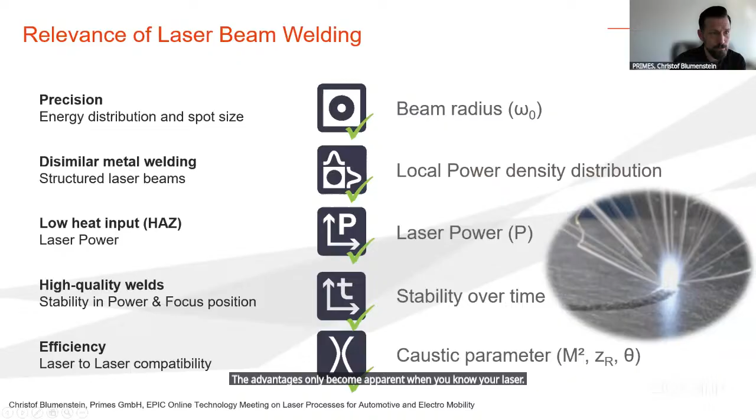I would now like to give three different examples of lasers used in welding applications. We will start with multi-mode, continue with single mode, and later combine those two in core and ring assembly.

First, I'd like to point out a series of measurements for which we measured a whole series of machines, all equipped with the same laser and used for the same purpose. We performed direct fiber measurements of multi-mode lasers starting at 100 watts up to a max power of 5 kilowatts, and as the fiber fills up with light, the calculated parameters change. In this case, direct fiber measurement means there was no additional optic involved - it was like the outgoing inspection at the laser manufacturer site. This test is normally performed at the laser manufacturer, but we sometimes do it as an incoming inspection at our customer site as well.

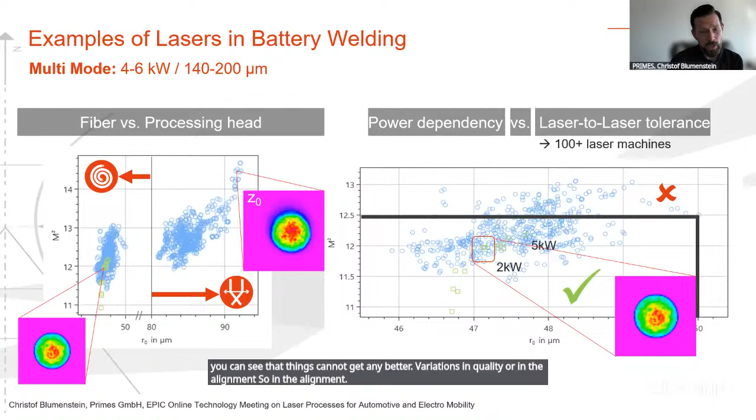For the following graph and data cloud, we will now concentrate on power levels above 2 kilowatts, getting rid of the 100 watt measurements. Even though we're now concentrating only on power levels used for processing the material, the variation is very large, and many data points are slightly outside the value specified in the data sheet. Each blue dot represents a full caustic measurement of 1 out of more than 100 laser sources characterized during this process. If you take the additional influence of the processing head into account, things cannot get any better - variations in quality or in the alignment, and pollutants intensify this effect.

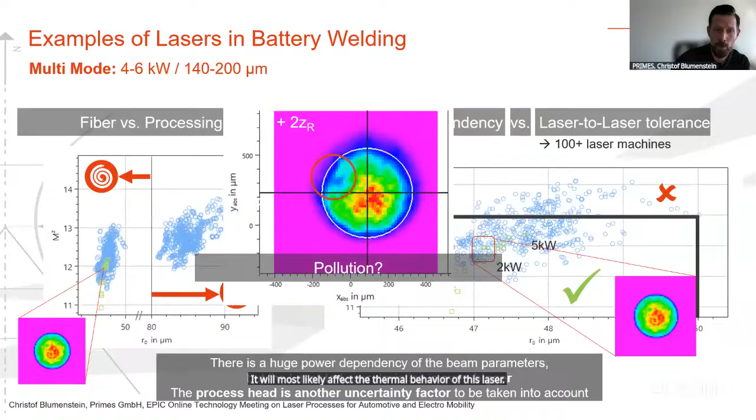But it's not just the change in the beam distribution at this specific position in the beam path. It will most likely affect the thermal behavior of this laser, so it does make sense to measure that.

The second example uses a single mode laser, displayed in red, instead of a multi-mode laser. The advantages are quite obvious: you can focus the laser down to a smaller spot and therefore achieve the same power densities at lower power, while maintaining the same Rayleigh length or working area in Z. Due to the use of longer focal lengths, you can process faster on even bigger areas.

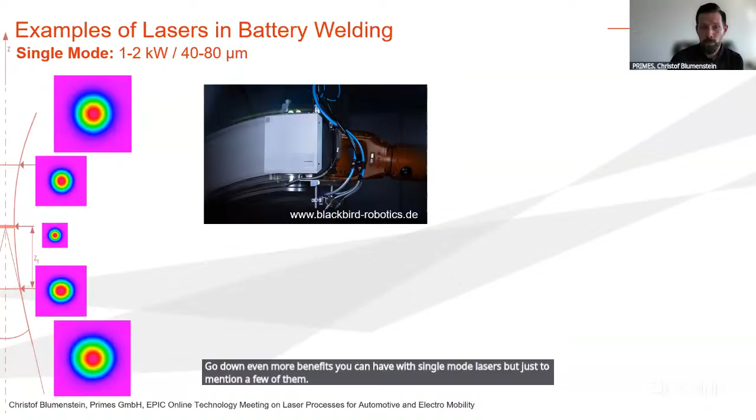Last but not least, single mode lasers are more sensitive to alignment and the quality of optical components. What we often see in the field is that the spot diameter or spot in focus is still quite round, but different effects might appear around the focus. One or two Rayleigh lengths outside of focus, in this specific example, I'd guess the quality of the optics used, probably the collimation lens, was not ideally chosen for this kind of laser. So different effects appear, which will result in changes over time.

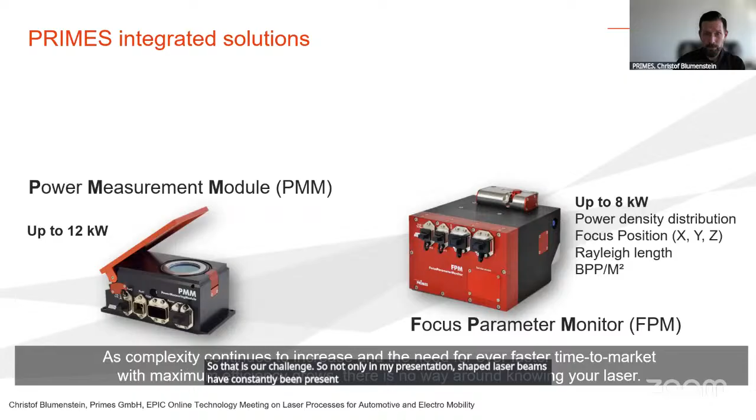So not only in my presentation have shaped laser beams constantly been present, not only round but sometimes oddly shaped, but finally I would just like to point out that we can measure them all, almost.

So I would like to close this talk with the two questions that came up in every single presentation: what can we do for you, and what can you do for me? We can make your laser beam comparable, that's one hand. And we need more sets of data as well as your experience to further improve our algorithms.

So we have done a lot of work on measuring structured beams. It is not limited to round beams, it can be any kind of beam shape. But without knowing the interaction between the laser and material, and what is important about the structure that is measured, you can generate analytics to put numbers on that, but at the end that doesn't make any sense.

So thank you for your attention and happy measuring. Thank you very much, Christof, very interesting presentation. We have time for questions or comments.

I have one question regarding the influence of the material on the actual energy distribution. That can be a little bit different when using the same laser with the same shape, let's say. Is that something you have in mind also, to introduce the effect of the material? Is it something you already do, or how do you approach this potential difference?